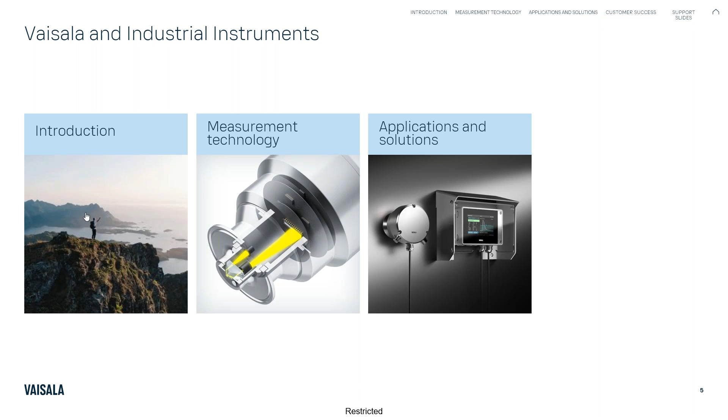So why install a refractometer? Generally it falls into three categories: you're going to either reduce cost, improve product quality and consistency, or increase safety. All three of those are important, and generally any reason you put in a piece of instrumentation is going to somehow fall into one of those three categories. When it comes to instrumentation, you aren't purchasing a piece of equipment because it's trendy, like a new iPhone. Whether it's a pressure transmitter, a valve, a level switch, flow meter, or refractometer, again, it generally falls into these three categories which influence the purchase.

So the first thing I want to talk about is refractive index. What is it? A lot of people don't know what it means, and it's pretty simple. The D in the ND is simply the measurement technique - it's the D-line light. We'll talk about that in the next slide.

But when you dissolve something in a liquid, it changes the optical properties of that liquid - specifically, it changes the speed of light. In a vacuum, a perfect vacuum, the speed of light is approximately 300 million meters per second. And in pure water, it drops down to about 225 million meters per second. It's pretty fast, but that difference is measurable.

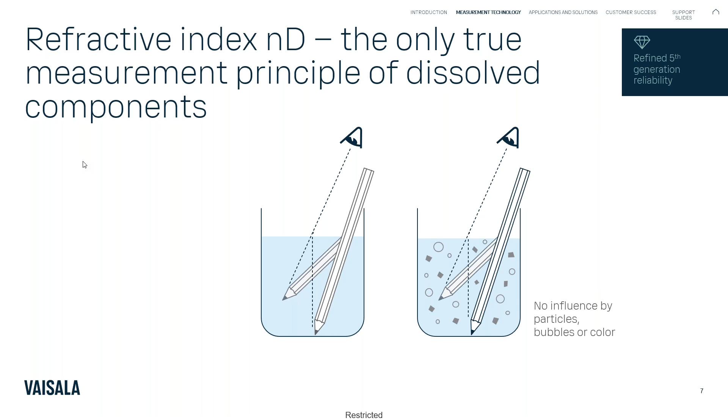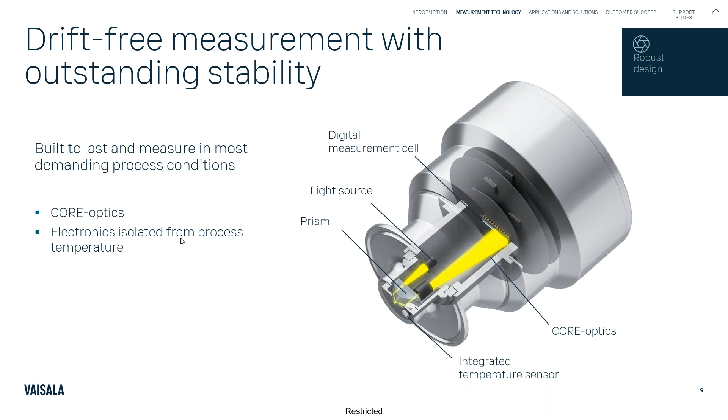That angle is going to change as that process loads up with sugar, salt, or acid concentration, higher or lower. That angle actually changes, and therefore the optical image on the detector changes, how much of a shadow or how much of a light area there is. And that's basically what we're measuring, where that shadow line falls on our detector.

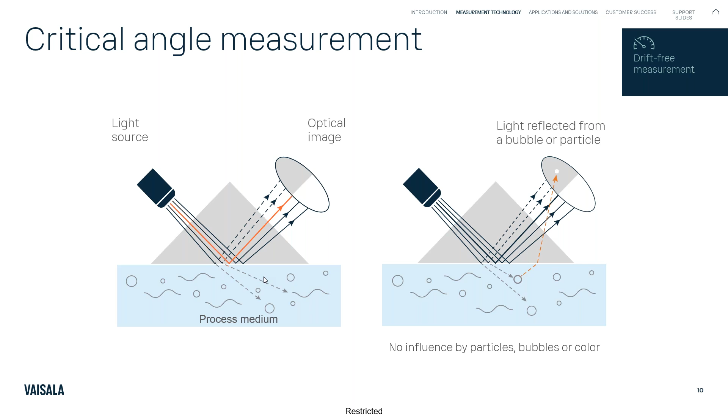Again, it's a CCD camera, actually borrowed from a barcode reader. So it's a reuse or repurpose of an electronic device.

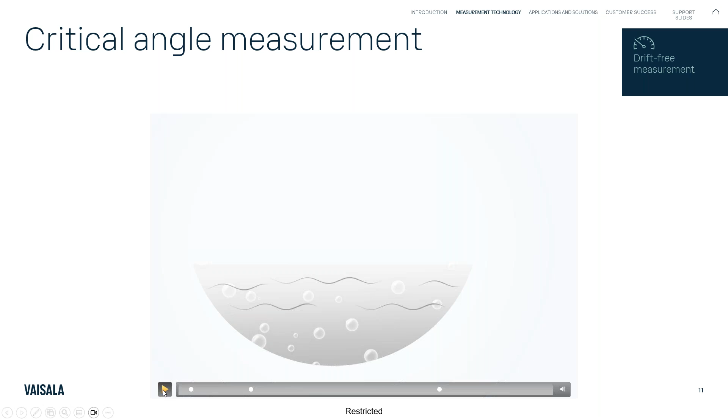So here's an animation that hopefully gives a better picture of what's going on, gives you a visual. I'm a big visual guy, so hopefully this comes through. What's important to see here is, again, as that media changes, that shadow line changes, but the light reflected from a bubble is just a blip in time. It's not really changing where that shadow falls. So we have algorithms to ignore the bubbles.

It's not affected by color. It's not even affected by the solids, the suspended solids that are in there. You could have a very thin liquid like water, or it could be something very thick like a syrup.

We can measure anywhere from 0 to 100 Brix. 100 Brix is something you can't measure because it's essentially granulated sugar at that point, but a Brix is defined as one gram of sucrose, or table sugar, in 99 grams of water for a 100 gram solution. 10 Brix is 10 grams in 90 for that 100 gram solution.

So as you load up the liquid with sugar, it starts to get more and more viscous. Again, we can measure, I've measured 80 Brix without a problem, 80, 85 Brix, and that's with what they call a fondant, or icing on the cake.

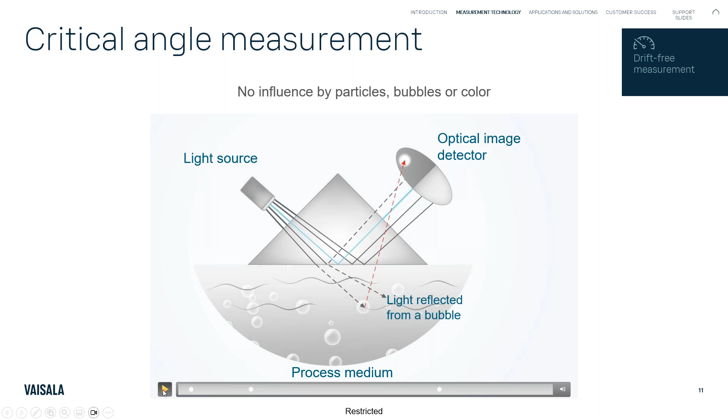Michael, we have another question regarding those air bubbles. Is there a specific threshold of number of bubbles or aeration, and do you follow installation guidelines similar to flow meters off of valves or elbows with regards to turbulence?

Yep, wow, that's a really good question. From the standpoint of installation, I like to have our sensors, whether it's a flow meter or a pH meter in a process line, up towards the top in an elbow, at an oblique angle to the flow so that the flow hits it and then takes that right turn. That helps keep it clean and gives it good turbulence.

I like the flow to be going up. If you have flow going down and you're trying to measure flow, for instance, that flow could be in a partially filled pipe and you never actually see the process. If the flow is going up and it's partially filled normally, it's going to be either a full pipe or an empty pipe, so you have basically either no liquid or 100% liquid. So it's always a good idea to have the sensor mounted in the upward stream, or horizontal, where you make sure you have a full pipe.

As those bubbles are coming up, they could affect it when you start to get into slug flow, but for the most part, simple bubbles traveling through are not going to affect it. There is a threshold I would expect, where you get to a certain point, but that's going to be more of a slug flow issue rather than just a few bubbles passing by. There is a timeout function, I don't know exactly what that is on our sensors, but it would have to be some substantial bubbles, and now you have a process issue rather than a measurement issue, I would think.

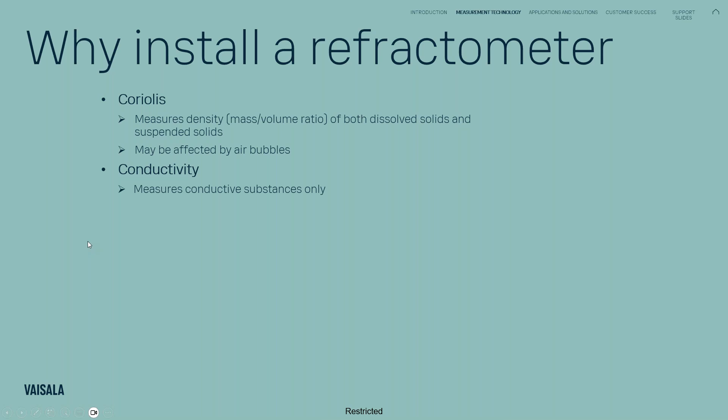Conductivity is a really good way, and usually a very inexpensive way to measure concentration of a liquid. The problem with it is it only measures conductive substances. So game over if you're trying to measure sugar or some hydrocarbons maybe. Even some alcohols are not going to be something you can measure with conductivity.

Refractometer, again, measures all the total dissolved solids, will not measure the suspended solids. So if that's something you want to do, you have to look at a different technology, or potentially two technologies here. Not affected by bubbles, color, or suspended solids.

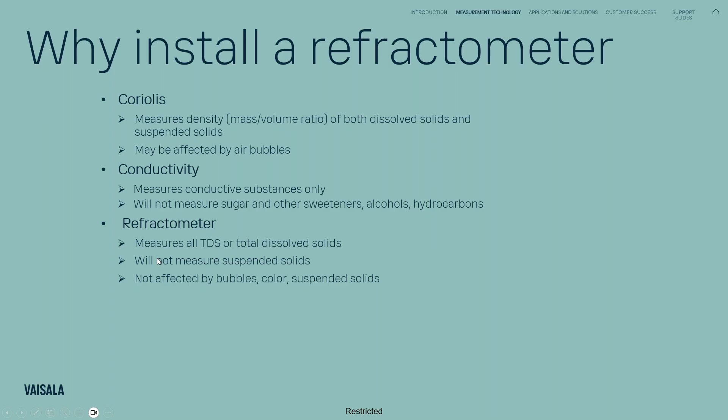So what are some of the industries? Pulp and paper is a big one. Food and beverage - I'm the Midwest regional manager, so food and beverage here in the Midwest is huge for me. Chemicals, ranging from measuring the concentration of an acid or a sucrose solution going into fermentation. Semiconductors is another big one, looking at the etching process or the cleaning process. Metals and mining, life science - every industry can benefit by looking at the concentration of a liquid. And again, many different ways to make that measurement. Make sure that you choose the appropriate one.

Application: mixing and blending, dissolving, evaporation. We're talking about saving money here, and evaporation is a huge one. Evaporation requires energy. You're putting energy in to drive off the moisture. So what are you doing to do that? You're heating it up, and you want to hit a set point to make sure that you get the product that you're looking for, the concentration that you're looking for. If you don't heat it up enough or long enough, you don't get to that point, and you're not giving the customer what he wants or giving the next operation in your manufacturing process the proper product.

Conversely, if you heat it up too long, you could be evaporating off more water, and now for that same volume, you have a much higher concentration that could affect your end quality or cost money because you're giving away product - not only giving away product in a higher concentration, but you've also wasted all of that energy in the process. So there's a lot of different applications and reasons why an inline refractometer is a really, really good choice.

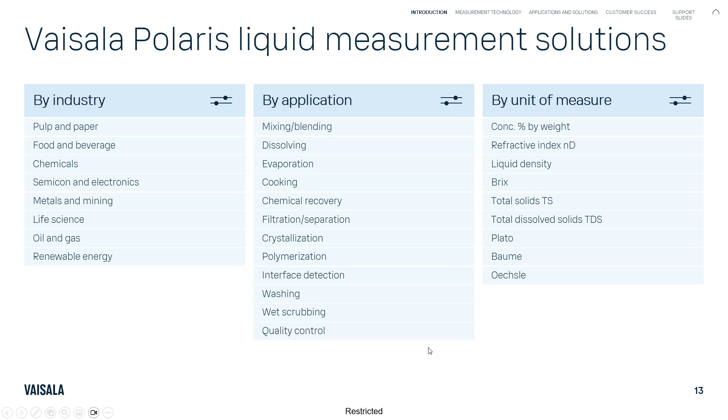It's a hygienic tri-clamp, tri-clover fitting, super easy to remove from the process to do any kind of maintenance, cleaning, or swapping it out if you want to put a spare in there. These generally don't need to be taken out if they're mounted properly and with enough turbulent flow. High velocity and turbulent flow is your friend when it comes to a refractometer - it keeps the tip of the sensor, that prism, clean.

This is our 3A version, EHEDG certified, full range, so 0 to 100 Brix. It's basically maintenance free - the only thing you want to do is make sure you keep that sensor clean. That right there cuts down on a lot of costs from a maintenance standpoint.

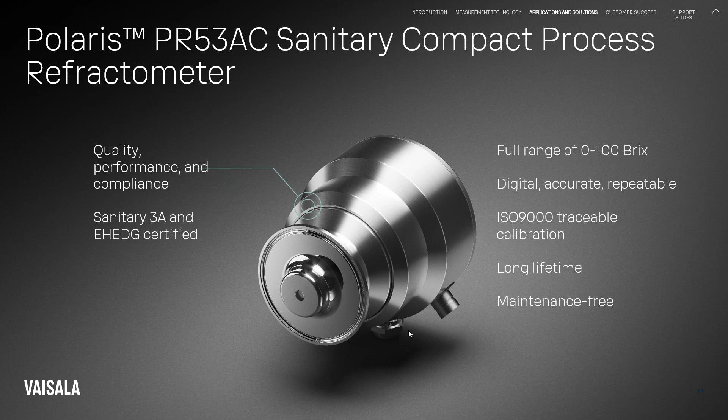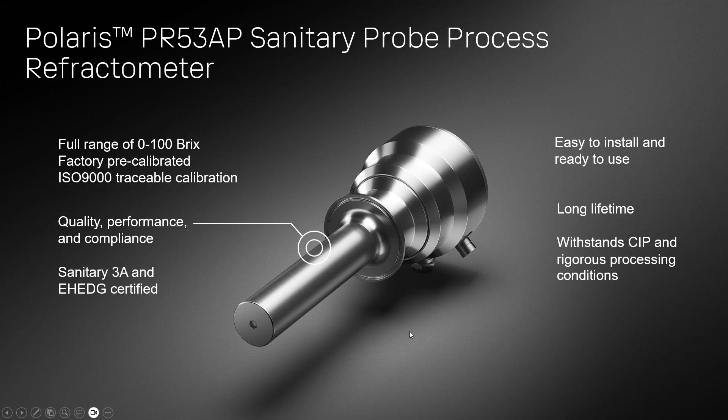Here's a similar version, but with a longer snout. This allows you to get into the process further, potentially into a larger line size, maybe through the side of a tank - just another version of that particular sensor. Again, it's a hygienic design, uses the tri-clamp, tri-clover fitting, and is very easy to put into and out of the process.

It shoots either a shot of high pressure water or steam across the sensor, and it prophylactically keeps that sensor clean. It's a lot easier to keep a sensor clean than it is to clean a sensor once it becomes dirty. So if you have a process like chocolate, where you're going to get a buildup, or in pulp and paper where there's a problem with coatings, some chemicals and so on...

It doesn't introduce a lot of water - it's on the order of maybe 50 milliliters of water per cleaning, but it's very effective at keeping it clean. And that's something that's user adjustable. So if you find out that you don't need to clean it as often as is set up right out of the box, you can change the frequency and the duration of each of the cleanings.

Michael, there's a question regarding this: Is there some type of diagnostics run in your transmitter so that you can see what a value may be, and then when that value changes to X, that you would actually run that cleaning cycle?

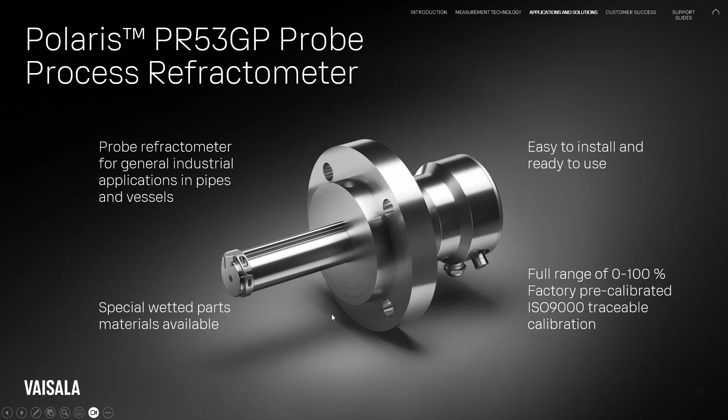We used to have a system that required something on the order of 20 unique steps that needed to be done, and this all allowed you to pull that sensor out safely. We've reduced that now to, I think, 7 steps. So it's much easier to pull it out, much safer to pull it out. And as long as you follow these steps, it will allow you to pull it out safely without any potential for process to be leaked out of the line while it's under pressure and running.

Again, another way of saving costs or reducing costs here. Every minute that you are not able to produce something because you had to shut down the line for maintenance or whatever it happens to be, it's costing you money potentially.

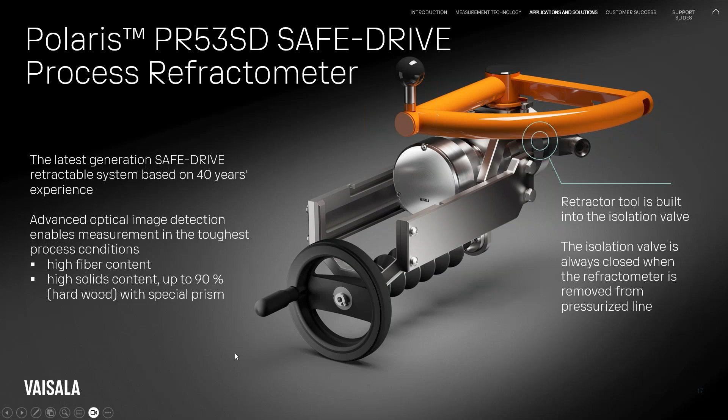In fact, you can use one of our refractometers to look at the process and also use one of our temperature and humidity sensors to look at what the environment is outside of the process. So in a room, for instance, where you are drying crackers maybe after—I don't know, that's maybe a bad example—but you want to control the humidity in the room, you can use an Indigo 520 transmitter for 2 completely different things. One to monitor the process and another to look at the room, what that temperature and humidity is.

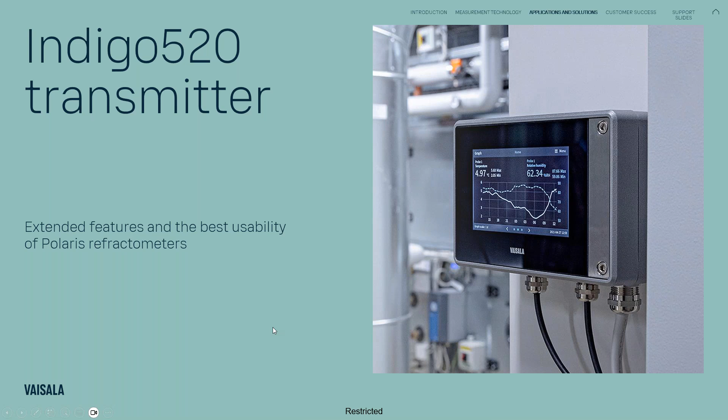A number of different things that you can see on this, as well as, you mentioned Jim, you can hit the right arrow right above the Vaisala logo there. You can hit the right arrow and go over to a screen that gives you the diagnostics. Very helpful in looking for problems or preventing problems. Again, saving money is all about keeping your process up and running, and the diagnostics is a huge part of that.

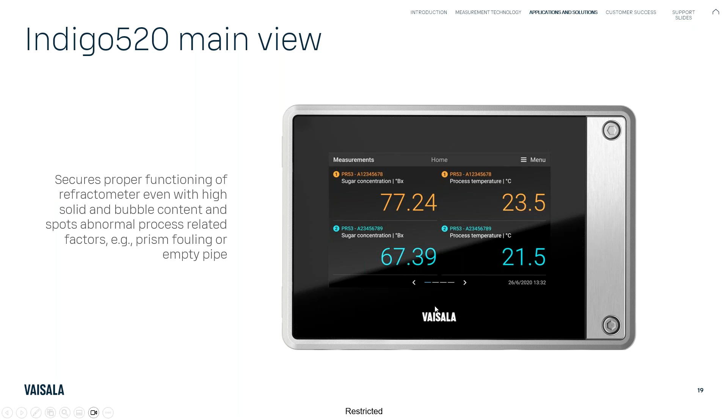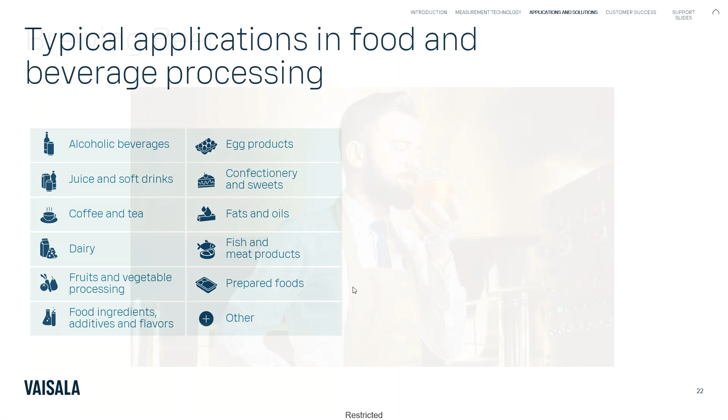Again, here are some of the applications. I don't want to go over any more applications here, but food and beverage, again, is something huge. We have a number of different application notes for literally over 100 different applications.

One of my favorites is the brewing process. You can see here, this is a schematic of what's going on in the brewing process. In every one of these, where you see the little red cap, that's our sensor. That's a point where it may be worth taking a measurement and taking the guesswork out of it, making sure you're getting the right concentration, making sure you're doing the full conversion of starches into sugars. Then once you're doing the fermentation, you're converting all of those sugars into the alcohol you're looking for. The whole point is taking the crushed grains and converting it into alcohol. It's all about the efficiency and what you're extracting out of those grains from a standpoint of sugars and starches, converting it into a useful product, which at the end of the day is the beer, right?

So it's all about optimizing your process. And obviously you're going to want to know temperatures here, flow rates. There's all kinds of instrumentation you can use. So I don't want to make this just a commercial for our refractometer. It's about all kinds of different products.

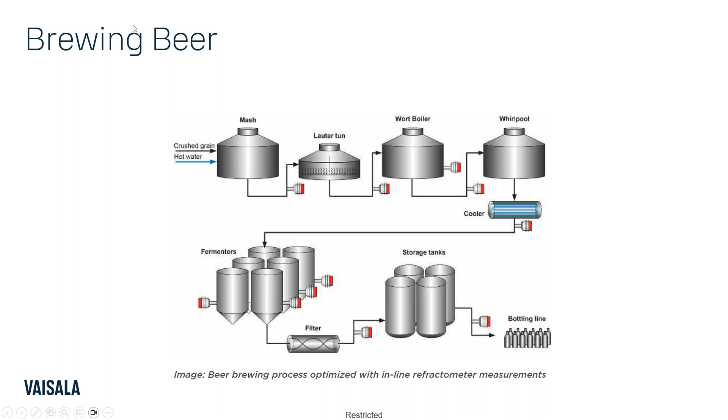Again, I mentioned what the impetus is for putting in a piece of instrumentation. If you have a level device measuring the level of a tank, that's great control. Measuring 20%, 30%, 40% fill in a tank, that's great control. The only problem is if that goes down, now what? Maybe you have a false sense of security, but if that goes down, you have no way of preventing cavitation of a pump, for instance, or looking at the overfill of that tank.

The overfill of a tank would cost a lot of money in cleanup, cost a lot of money in product being lost. Safety risks, huge safety risks. So in addition to that level controller, why not put a point level device up at the top to prevent a spill, or at the bottom to prevent a pump from going dry and costing thousands of dollars for a new pump because you cavitated it. So a lot of different reasons for putting in automation besides just making it easier. A lot of savings and costs that potentially aren't even thought about.

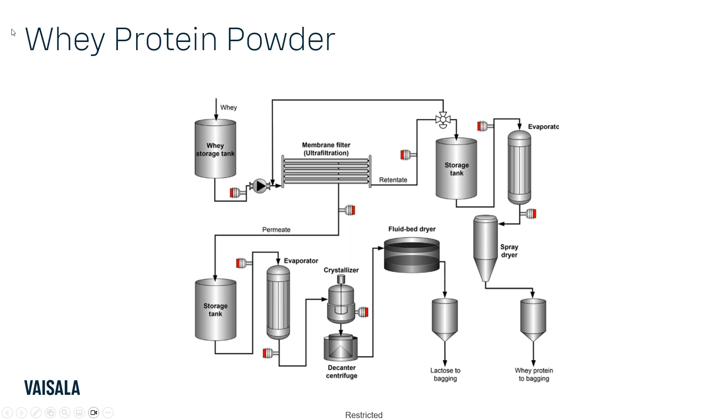So whey protein, I mentioned drying. In this application, drying or evaporation is a huge expense. There's a lot of money going into that, and making sure you control that evaporation properly, that you evaporated enough but not too much to control those costs. It's a very big savings potentially for some customers, for many customers.

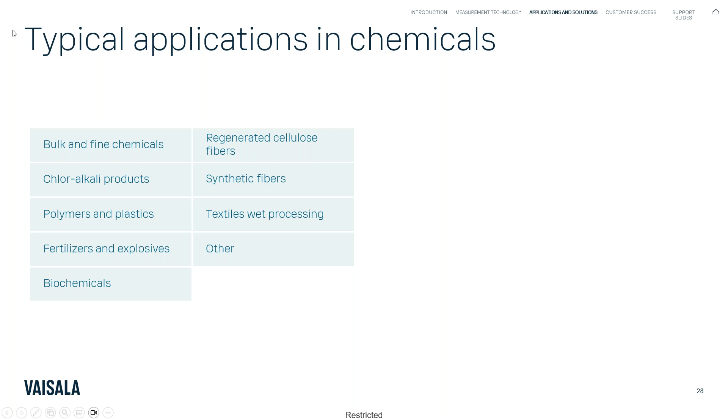Applications in chemicals. Again, if you're making chemicals for in-house use or you're selling them, you want to make sure that you're selling the same product all the time. If you're not giving them their money's worth, they may look for another supplier because you're supplying 10% instead of the 12% they're expecting. Or you're giving it away because they're expecting 10 and you're giving them 15% because you aren't looking at the concentration throughout the manufacturing, or concentrating or diluting of those chemicals. So just another place to look at automation.

Again, we have all kinds of application notes that you can look at. But again, why are we looking at refractometers, or as I put here, any piece of instrumentation for that matter? You're going to want to reduce costs, improve product quality and consistency, or increase safety.

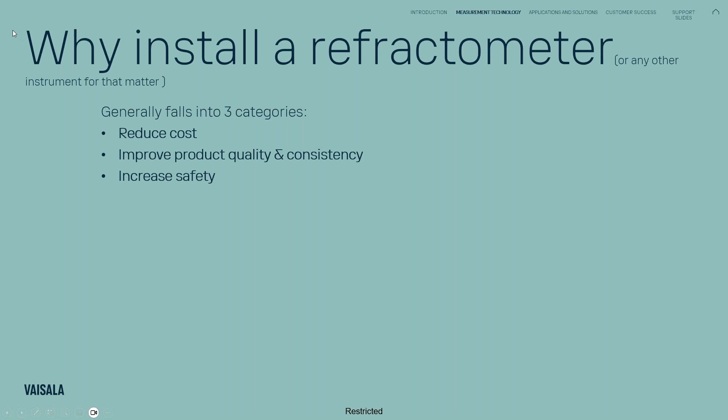Some of those examples: reducing cost. Efficient automation typically lowers the operational cost. It increases the yield, usually, not necessarily, but also reduces waste. You aren't redoing a process because you overshot or undershot. Many applications, you don't need to worry about that too much because you can either add more water or concentrate it a little bit more.

But if it's a batch process, there was one customer I ran into where if their process isn't done correctly the first time, there's no rework. And a lost batch is on the order of $100,000. The cost of a refractometer would be paid for many, many times over with one lost batch.

Lower energy usage. I talked about evaporation, but you're spending a lot in pumps and opening and closing valves and moving product around. Why not make sure that you get the best use of your process and save money in doing that?

The other nice thing, and this isn't just with a refractometer, it could be taking pH samples and so on, is you get an immediate response to any deviations in quality. You're going to know it right away. And if you do it correctly with the PLC, you can correct them all automatically rather than having manual intervention. All of that translates to reduced costs and potentially lowering raw material usage. Instead of adding X amount of chemical, you're able to add X minus some of that chemical.

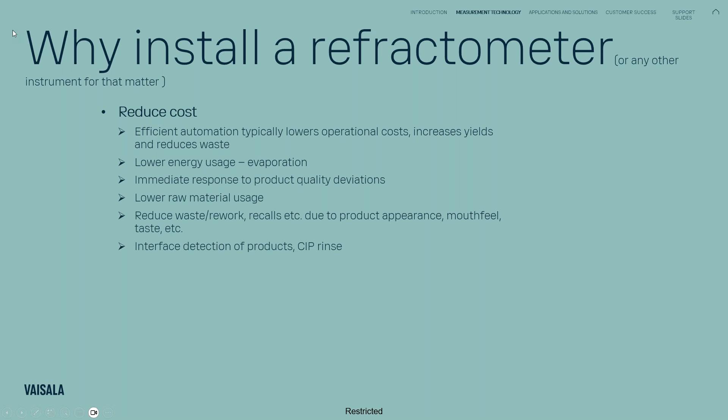And they pinpointed it because it was run into their PLC. They pinpointed it to the precise moment that the cleaning crew swept the cleaning solution into their wastewater system. That's how quickly it was able to point out a problem. So online detection of a wastewater stream is potentially going to save you a lot of money in shutdown, levies, fines, and so on.

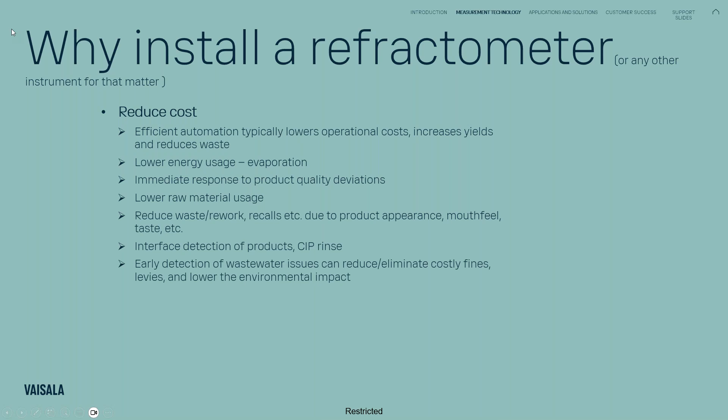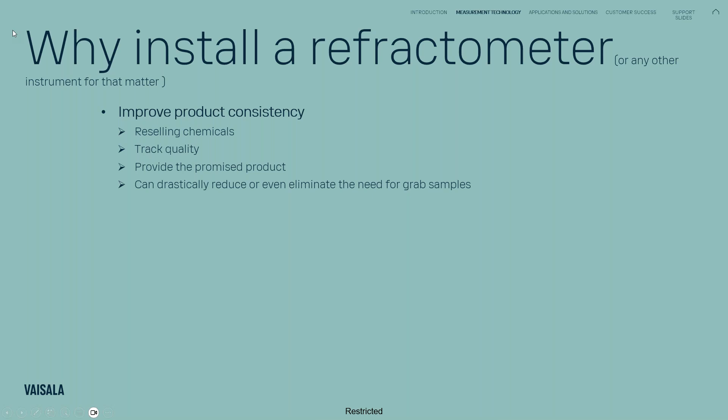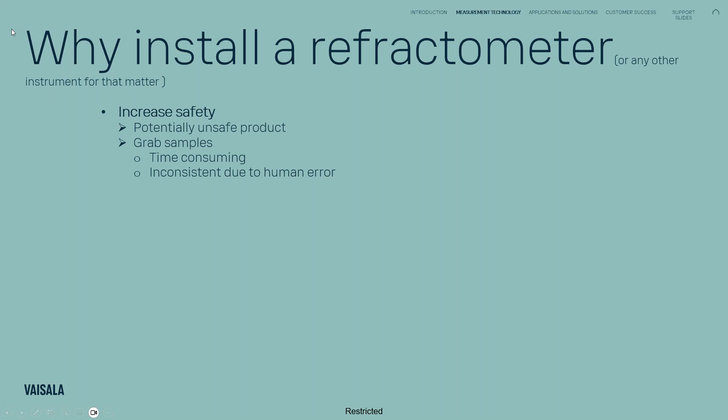Again, potentially hazardous. And by the time you take that sample, it may be too late. If that sample takes 20 minutes to take and get the results back from the lab, a refractometer could have given you that information immediately. You could have taken corrective action, whereas the horse may already be out of the barn at this point.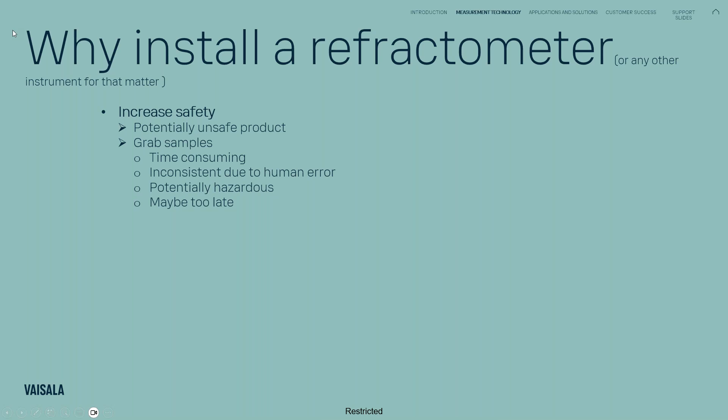So a couple of things in closing here. Belt and suspenders is a fashion faux pas, but if it's critical and safety is a concern, redundancy is important. You might want to put two sensors in, whether it's a pH sensor, a pressure sensor, or a refractometer. Don't underestimate the need for spares. Having a spare on the shelf, even if it's something that is bulletproof, don't underestimate damage. Somebody coming up there and ripping the wires out because they were trying to climb up on the side of the process, and they pulled the wires out, and it directly pulled out components on the printed circuit board, for instance. Having a spare is important.

You could have chunks going through the sensor or through the process and strike the sensor and crack the sapphire prism on our refractometer. Have a spare. If it's critical for you and you don't want to have your process shut down, spares are essential.

We mentioned early detection in the waste stream. A refractometer can help, but it's non-selective. It won't measure what's going on. It'll alert you to a product. It can't tell you, hey, I have sugar, or I have cleaning solution, or I have acid in there, but the refractive index will go up. You now have to identify what that problem is.